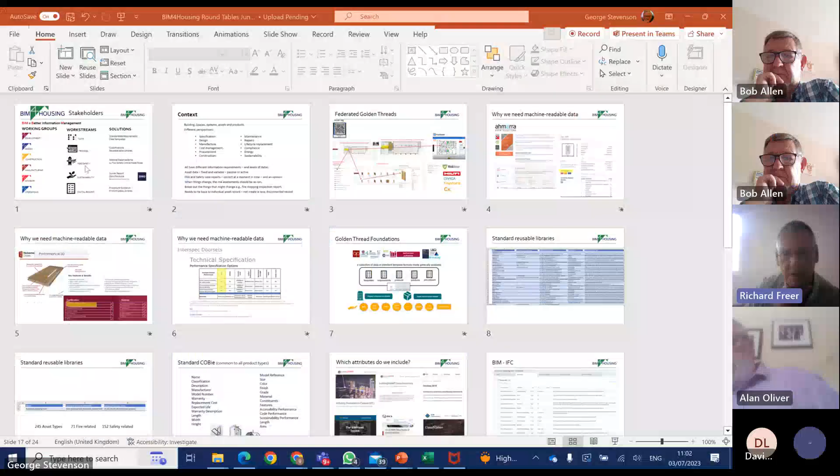When we took over BIM4Housing a couple of years ago, one of the things we wanted to do was move it away from BIM being about 3D modeling and focus on better information management. The question is, what information do we actually need to manage? Different stakeholders need different things.

So we set up different working groups, which meet once every two months. We've got 36 of these meetings each year, and typically they have 20 to 30 people attend.

What we do is try and look at what information would make their tasks easier. For example, what would make a construction team's work easier if developers provided them with better information, and likewise operations teams if the construction team handed over better information.

The way we acted on that is to set up work streams, which then work for probably 3 or 4 months to focus on certain things. For example, we focused on producing standard data templates and standard processes. The work we're doing today has come out of the fire safety group, looking at typical critical assets. We've got a lot going on at the moment with decarbonisation, and also trying to standardise digital records and safety case reports.

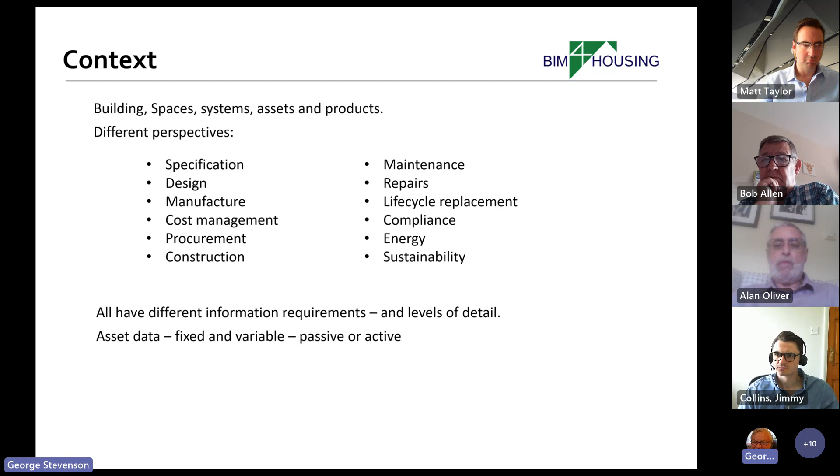The other thing is that a lot of the things we've got going on at the moment, particularly because of the Building Safety Act, are snapshots in time. Although it's important to have a safety case report, we also need to recognise that the landlords have got to have everything current at that point in time. So you can't simply say, well, we were okay when we did the fire risk assessment last year - it needs to change as risks change.

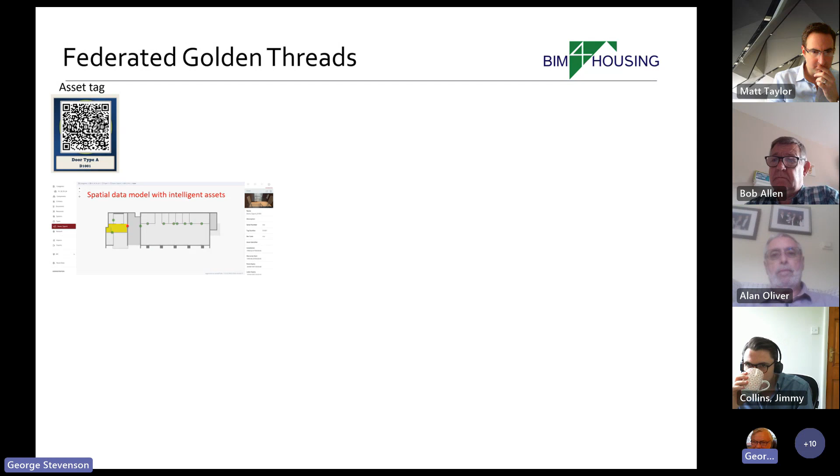And then to be able to tie everything back to an individual asset, not simply recording the fact that we've done an inspection. Part of the process of doing that is to use RFIDs or tags for asset types. But one of the things that's important is to recognize that we're ending up with lots and lots of golden threads.

From a construction point of view, we're probably testing to make sure that certain information has been provided. From a manufacturer's point of view, it's important to tie that together with what the product was that was actually satisfying it, and then the product data being provided, but then looking at it in context of where it is. From a fire engineering point of view, you really need to know what the spaces are on either side. That's why we're trying to federate together all of these different threads that are being produced by people using excellent applications like Plan Radar, Riskbase, Hilti, Keystone, CX. The important thing is that they shouldn't all be separate, isolated information sets - we need to be able to bring them together. That's one of the reasons we need the information in a machine readable format.

A lot of the information in this data sheet, for example, is well laid out, easy to understand, but it can only be understood by a human. So fire rating, for example, is presented in this way that a human can read it, but it's not machine readable.

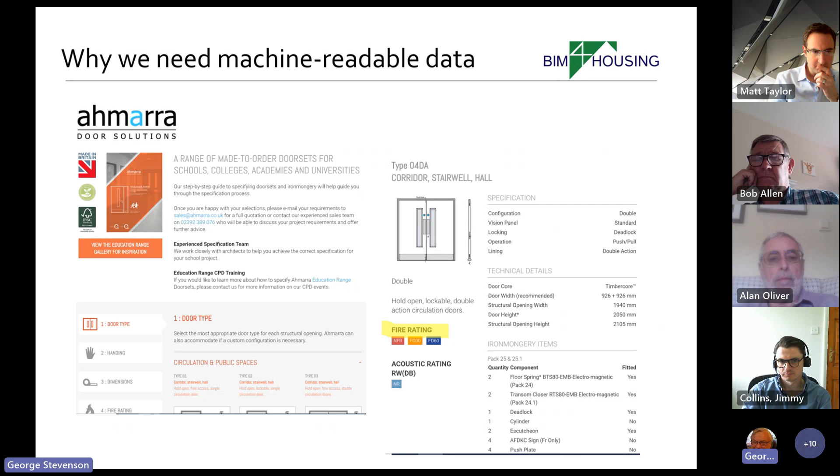So certain of the information we want to try and make sure is machine readable. We've been on this journey for the last couple of years with HACT and organizations to try and come up with standardized data templates, which we can share with you if you're interested. That can be used either for new projects or for existing buildings. And if we organize it that way, it doesn't really matter what software you're using, because we can present the information in a standardized format.

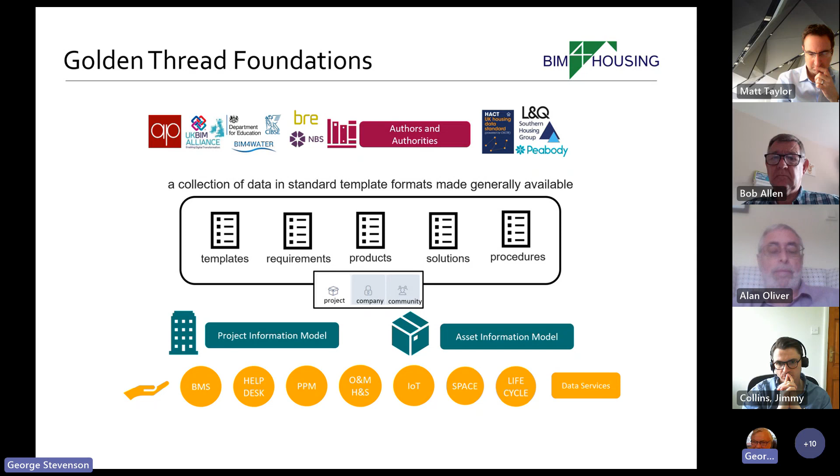This is some of the work in progress we did with HACT to come up with the 250 or so standard asset types that we've got. So here, for example, on the left-hand side in column B, we've got standardized names that have been agreed across the different social landlords as to what something is called.

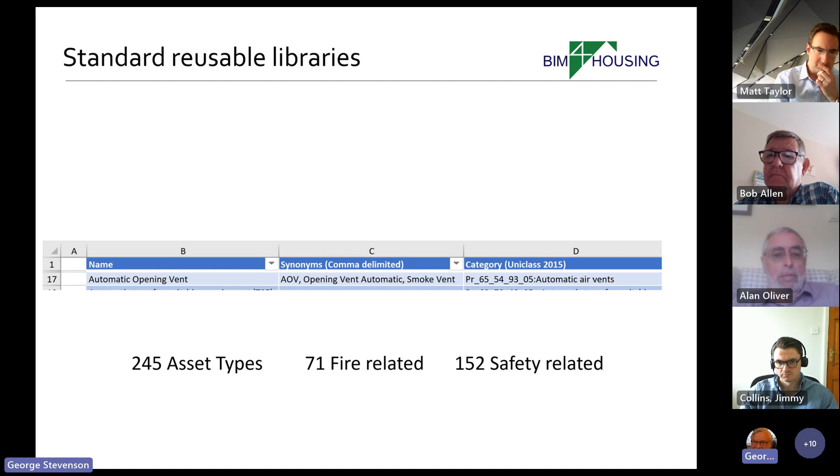Now, that might seem blindingly obvious, but if you look in the synonyms column, you'll see that an AOV, for example, is described as either an automatic opening vent or a smoke vent. By putting them into classifications, it means we can start to provide some sort of order we can tie data back to. So we've actually got 152 safety related assets identified, of which 71 relate specifically to fire. Now that's again interpretation, but it gives us a basis on which to work.

Some of you will know about COBie, some may not, but COBie is the international standard for asset information exchange, handover information exchange. So that's what we tend to use to do the high level information.

So here, for example, this is common to any type of asset. Doesn't matter whether it's plasterboard, a door, a fire collar, a smoke vent. They're all standard. The thing that makes it different, the difference between the attributes needed for a fire collar or a damper or a door or a wall, will be down to that particular type of element.

And the question is, which attributes do we include? Building Smart, or the BIM community, has got a large data set that we work to. But there's other information as well - classification systems. NBS have got their own data sets. CIBSE have got their own data sets for building services. The surveyors and cost managers have got their own data sets, as have the wholesalers and merchants - they use ETIM. So the question is, which attributes should we or shouldn't we include?

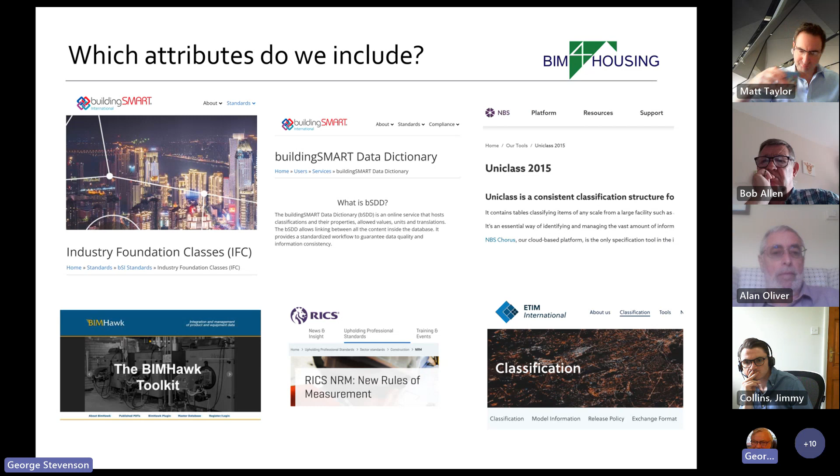So we led the Golden Thread initiative, which L&Q set up for asset and survey information. One of the challenges was to ask some of the people on this call, actually, what data do we need to know about firewalls? And the answer to the question is invariably, it depends. It depends on where that wall is, what it's doing, and also how it relates back to building regs. So that's the purpose that we did.

And this is the exercise. We've done this now for 10 of the 12 asset types. Today we're doing this, tomorrow we're finishing off with dry and wet risers. And for each of these different processes, we've actually looked at what does the asset comprise, how is it made up.

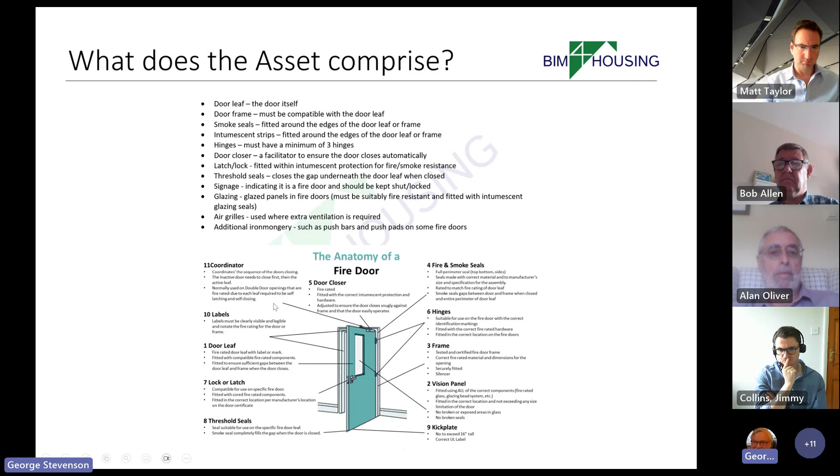Also, what information can we put in - for example, for this door - that can be managed separate from the BIM models, but is specific to it being a door? So for the fire door, some of these, like fire rating for example, may be common, but obviously a lot of the others won't be.

So we need to be able to hold this in a database rather than in the BIM systems, because it might be that it's not just BIM systems, but also we want it for procurement and operations. So the way in which we go about that is by holding it in databases and then using API connectors to connect it back to the applications.

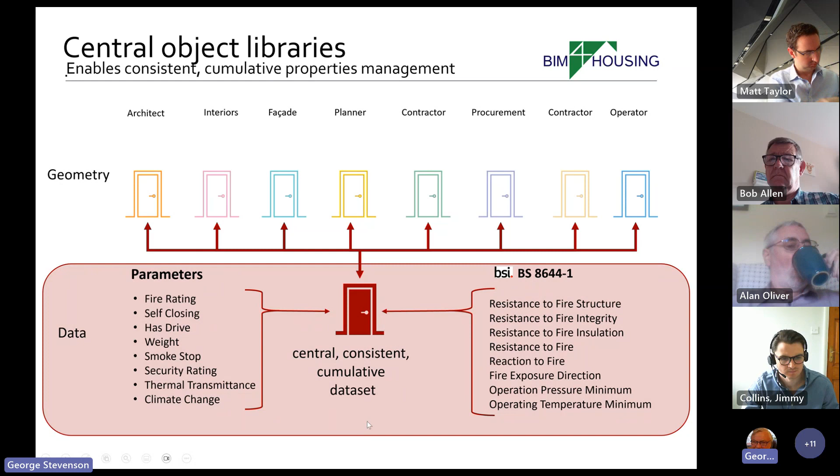So that's why this exercise that you're going through today is so important. It also means that when new information comes in, like the new fire standards, it means that we can relate it easily to that same information and do that as an update. So I'm just going to show what we've already got, and this is what we're going to go through today. What is a firewall?

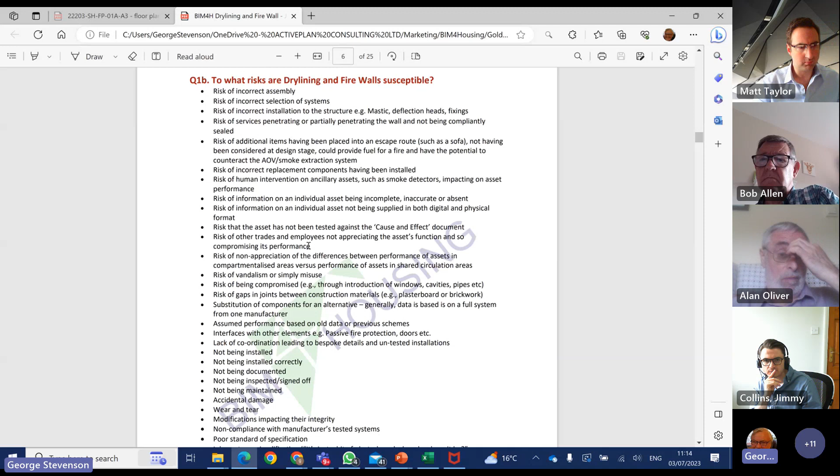What risks does the wall mitigate? We have to answer that question to align it with what the regulator's looking for. We also wanted to identify from the roundtable sessions what actually goes wrong. Matt Taylor, who's on this call, gave us some great examples of things that don't work. And there's a lot of things that people do wrongly that prevent the firewall from working.

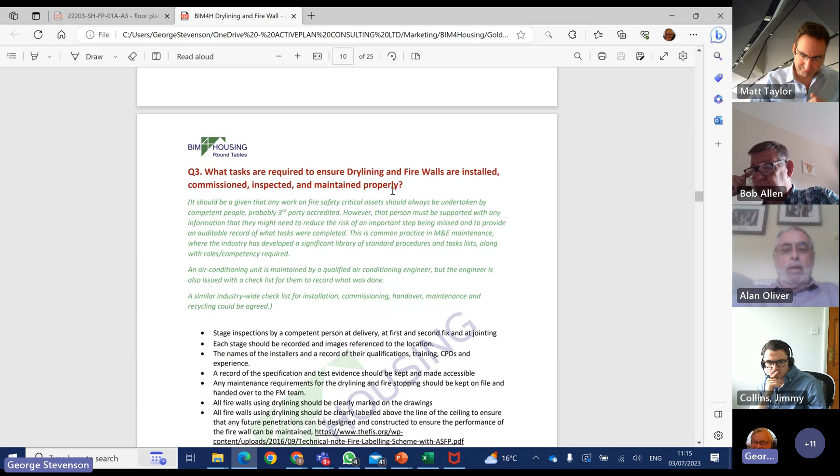The next question we're going to go through is what information's needed, and this is where we want to try and get to that machine readable information, if at all possible. Then we're going to go on to talk about the tasks required to ensure that things are installed properly, commissioned, inspected, and maintained properly. And then finally, we go on to competency. What levels of competency are needed? Big topic normally. And how should we manage changes?

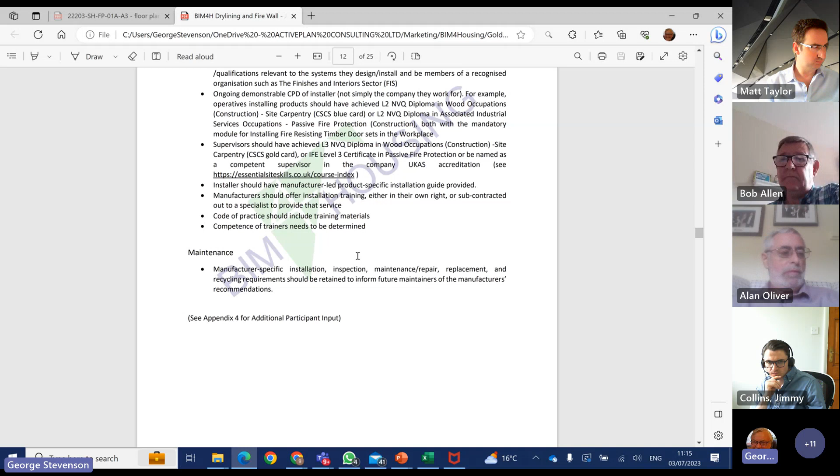So this is the work that was done 18 months ago. We're now refreshing this to reflect what we've learned over the last couple of years. Okay, back to you, Richard.

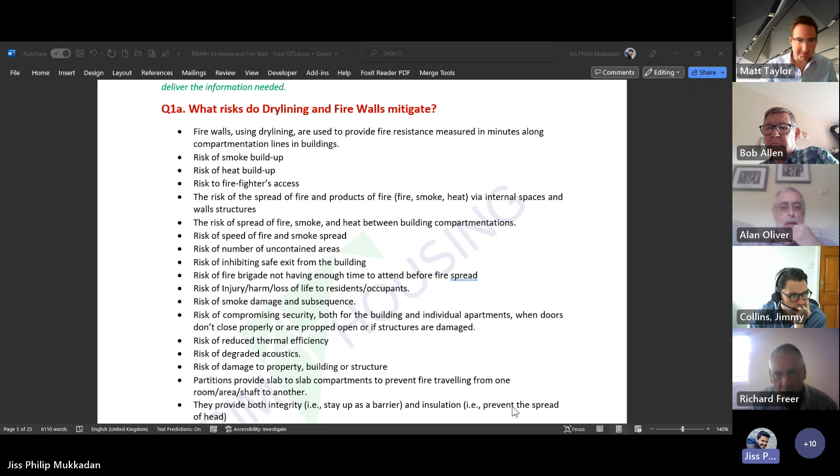Are you there? Yeah, I'm here, I changed it. Can you see? I already changed it into heat. Oh, it's not showing on the screen. Let me just close the sharing end. It's at the bottom of the screen. Is it okay? Can you see? I can't see it yet. Just a black... yes, okay.

Right, so sorry, Alan, the one further down, what? Yeah, and then the one further down, it says the spread of heat. It should be the transfer of heat. You don't spread heat, you transfer heat. Well, that's transference of heat then. Transference of heat, yes, yeah, transference of heat. And again, it says up above it, they provide both integrity, stay up as a barrier, and insulation, prevent the spread of heat. That should be prevent the transfer or transference of heat. Right, okay, so where it says prevent, that's it. That's the one, the transference of heat. Okay, good points, good points.

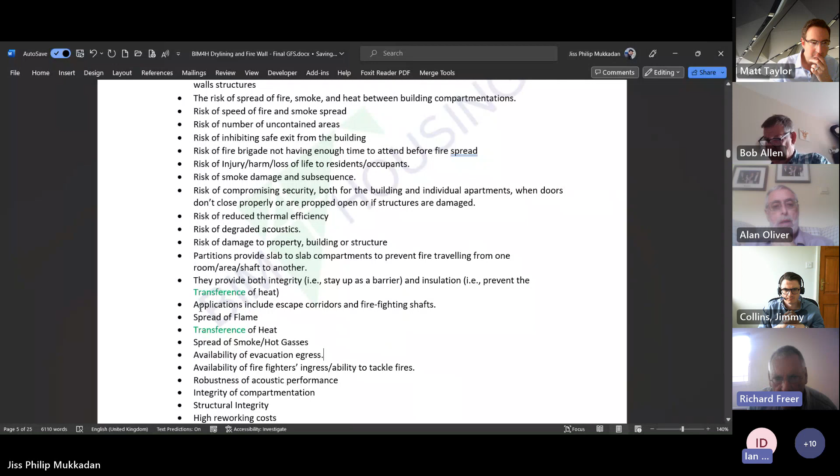Anybody else got anything that is glaringly missing or needs amending on that list? Is that the bottom of the list, Jiss? Sorry, I've just got a comment there. There's one above where we were. Applications, sorry, it says applications include escape corridors and firefighting. Yes, yes, should applications be in there? It's what they mitigate, not the application, isn't it? Not where, no, you use it, it shouldn't be there. No, that should be somewhere, but yeah, not there. You're correct, thank you.

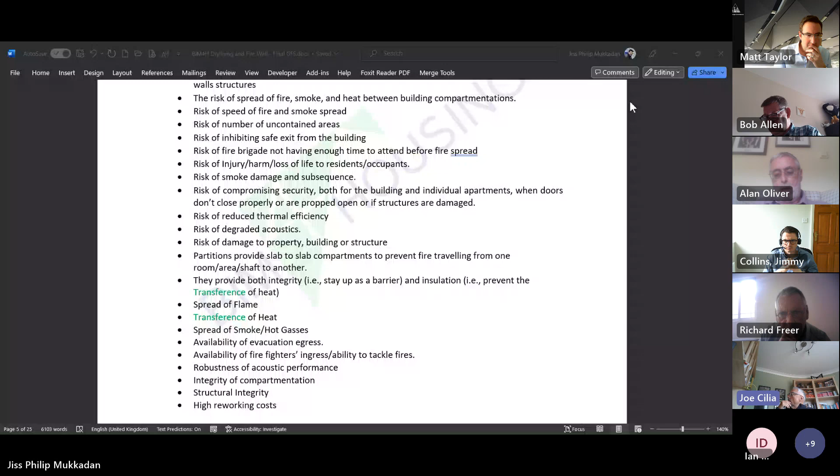Anybody else? Just looking down the list. Second item down, risk of smoke buildup. What do you mean by that? Because the risk of smoke buildup, if it's a compartment and the compartment isn't ventilated, it's the ventilation system that deals with the smoke buildup.

Yeah, I think that needs removing. Do you think? What do you think, Matt? I'd say we've got spread of smoke in there already. I think there's a number of different factors in relation to smoke buildup, including ventilation and other services concerns, which is generally outside of the dry lining. Do you remove it then? Take it out? I think it's covered elsewhere, covered in spread of smoke.

Excellent. Anything else? The risk of degraded acoustics - are we saying risk of detriment to proposed or specified acoustic performance? I don't know, it depends. I don't know who added that. This came up on a number of meetings about acoustics, and it was a new one to many people. At the time it made sense, but I don't remember the background to it.

So the only risk I can understand about degrading acoustics is the risk of the sounders not being heard from one space to another, but that's mitigated separately. The wall itself will provide airborne sound insulation - that's one of the reasons it's there in the first place. So as a risk it will be about the sounders, but again I think that's mitigated separately in the sounders themselves. Yeah, let's take it out then.

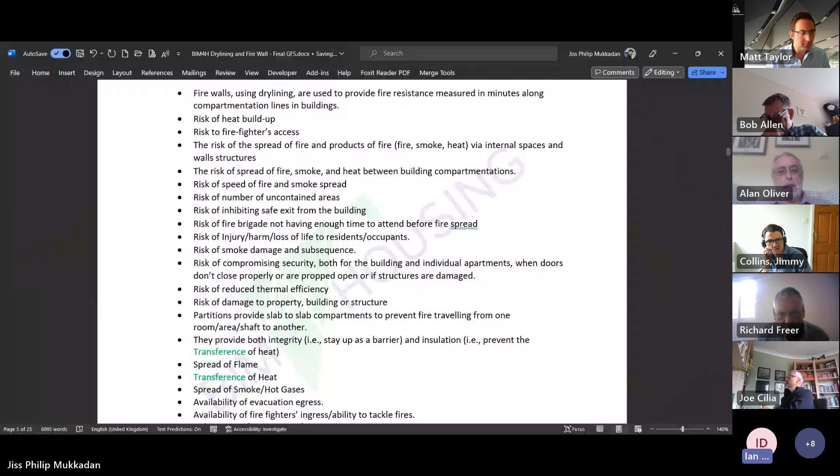Can I just say that quite a few of these are repeats of themselves, aren't they? Exactly, I reckon half of that list is probably a repeat of the other half. Could be - offline it would be worth just going through and culling a lot of them that say the same thing. Yeah, looking at covered deduping - you've got transference of heat in about 10 different ways, and transference of smoke. At the end of the day we're saying the same thing many times, aren't we? Yeah, okay, definitely. Let's scroll down to the next one.

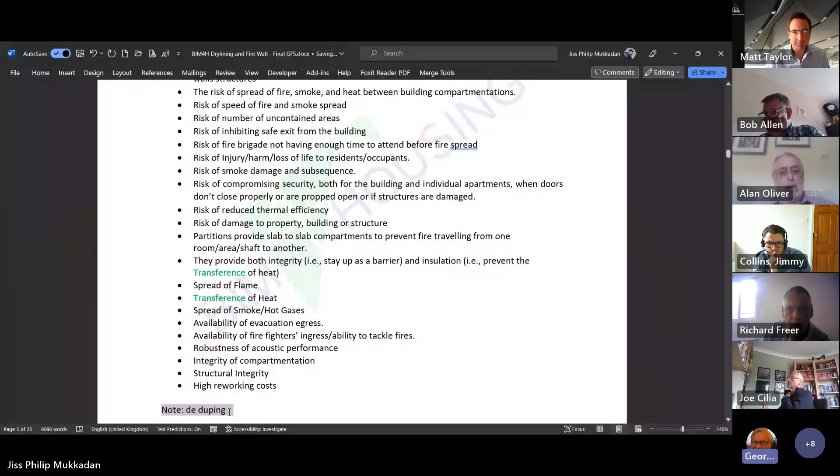Ian, is that something you could help Richard with afterwards? Ian? Sorry, I muted myself.

Could you help me do some of that deduping after the meeting? I think it's pretty straightforward - just look at them all. If I got a copy of this offline, I can. Yeah, if you could do that, give an opinion. I think part of the reason there's a lot of duplication is because a number of people put comments on that were slightly different and had a slightly different emphasis than others, and we didn't want to miss anything out. But if an expert can help me go through that and make it just one line instead of five, that'd be excellent.

Alan. Okay, looking at the bullet point just before the bottom where it says substitution of components for an alternative, generally data is based - so that's reading correctly? Yeah. Generally data is based on a full system from one manufacturer. There's other people here who can probably confirm this better, but I think it should say one board manufacturer. The fire tests tend to be done by board manufacturers, and I think it's important to put the word board in there. Somebody's shaking their head very strongly.

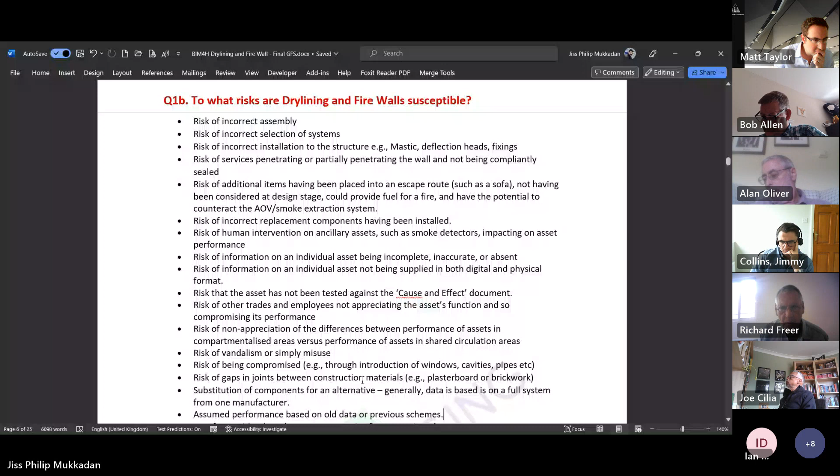What risks are drylining and firewalls susceptible to themselves?

I think we've got the same issue as Ian suggested earlier. There's doubling up. Well, that's not an issue because we're going to sort that out afterwards.

I don't know whether you're planning to put these in some sort of order, but the first risk is incorrectly specified. So you've got selection further down, selection comes up, but if the specification is wrong, everything thereafter will be wrong.

Right, now we've had this before. This is George, help me with this. Didn't we have this before? And it's about the asset, you're talking about what's the risk to the asset itself.

Sorry, wrong specification isn't a risk to the asset itself. It's a risk to the... George, help me.

So I guess what we're saying here is this particular clause was put in, Joe. It's added in, that's why it says 1B. It's because when we've been in the meetings, people have told us about things that tenants or people do to the asset to stop them from working. So that's the purpose of it, rather than looking at the design and construction side of things, which we do come on to, if that makes sense.

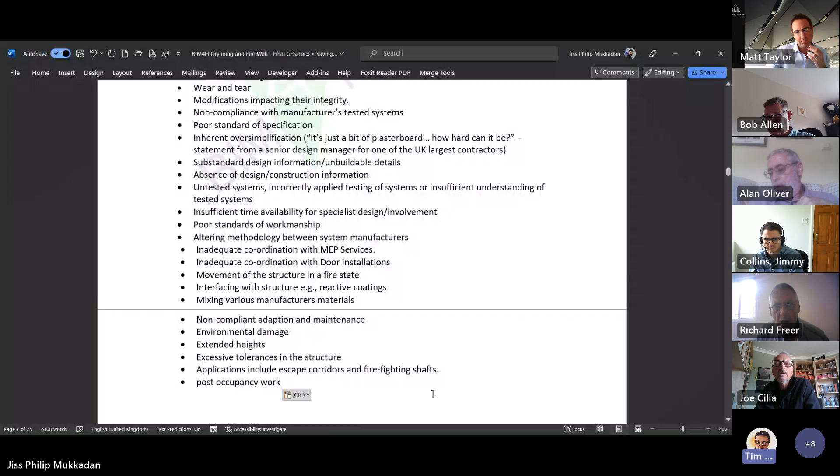Could you just put something in the chat for us, George? Yeah, I've just put something in the chat. I think it's post-occupancy work. Isn't it covered by modifications impacting their integrity?

I wonder whether people would understand that, whether you need to be really basic - don't put a pipe and a duct through something that's already there without designing it. Okay, well if you could put something in the chat for us, then we can pick that up and won't miss it.

Matt: I'm not entirely sure at this time how this might be worded within the bullet points, but one of the risks I see time and time again is the assumption that a system can be used in a bespoke arrangement and still achieve the same fire performance as the tested system. The system manufacturers test under quite strict test guidelines to prove a system is capable of providing a certain fire performance. And now even under European standard, there's an extended application scope for that test information.

But when we design buildings, we design interfaces as we want that interface to look. So we look at various weird and wonderful arrangements and assume that the standard test information for that manufacturer's system is going to cover that. We've got a section on information - I think possibly it would be more relevant there, Matt.

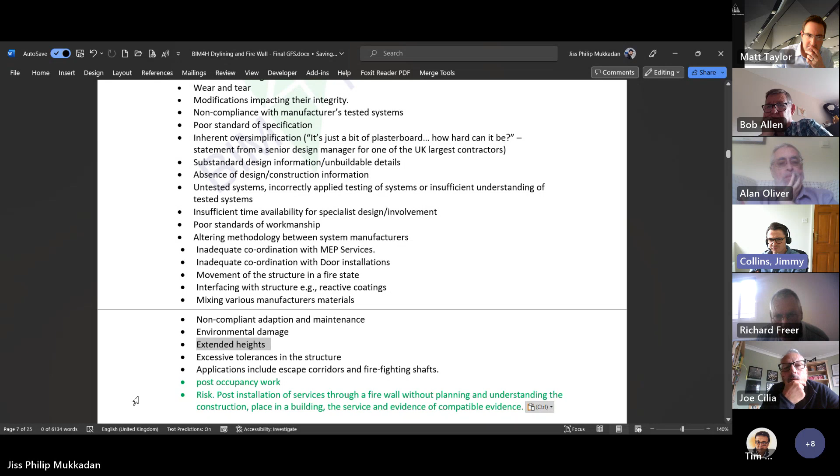I think it's similar to what Matt's saying, just a bullet point saying extended heights is quite misleading and vague, and I don't think that's particularly helpful. There was also a note above about testing to a cause and effects document. I'm not quite sure what that means.

Right, sorry, well, let's do one at a time. So you're talking, what's the one at the bottom? It just says extended heights. Extended heights, right. Does anybody know what that means?

Well, it's referenced, or should mean. Yeah, it's in reference to the changes, the removal of the BS series and the move to EN, as Matt was alluding to, and there's fewer fields of application available in drylining. So it's not clear. Is that what you're saying? Yeah, I think that's it. Could you put something in the chat for me that would be clearer?

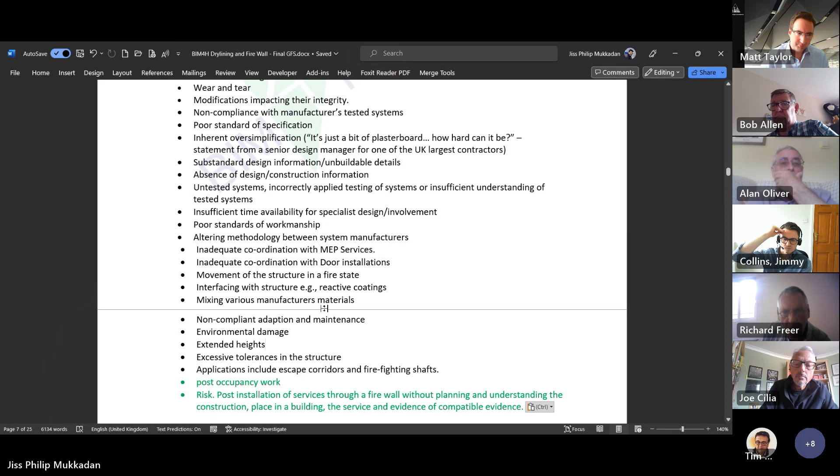Fantastic. Sorry, and the second point, I think it was further up, was around... scroll up, Jiss. Jim is from Knauf, by the way, so just to note. Here we go. Sorry, the risk that the asset has not been tested against the cause and effect document.

What is the cause and effect document? Joe, would you know that? Because as Matt alluded to, sorry, it's on mute. No. We test to an EN by a test methodology. I don't know what that means. That's come up, a number of the meetings have alluded to a cause and effect document.

Yeah, it's part of the fire strategy, I think. Okay. Is anybody on? There's a lot of people on this call that are much more knowledgeable than me, but certainly I've heard of cause and effect documents regularly. I could pick that one up maybe. So it's Ian Doncaster here, we do smoke ventilation systems.

So when we're commissioning a system, we would need to check it does certain things under certain different conditions. So our cause and effect document would be that. But it's more about mechanical operation under different conditions, really, or under different control conditions. So it's about the control strategy to meet the fire strategy. But I could see the only reason might be something like which side the fire's coming from, because depending on the cause and effect, you might have fire from the inside or the outside of a shaft.

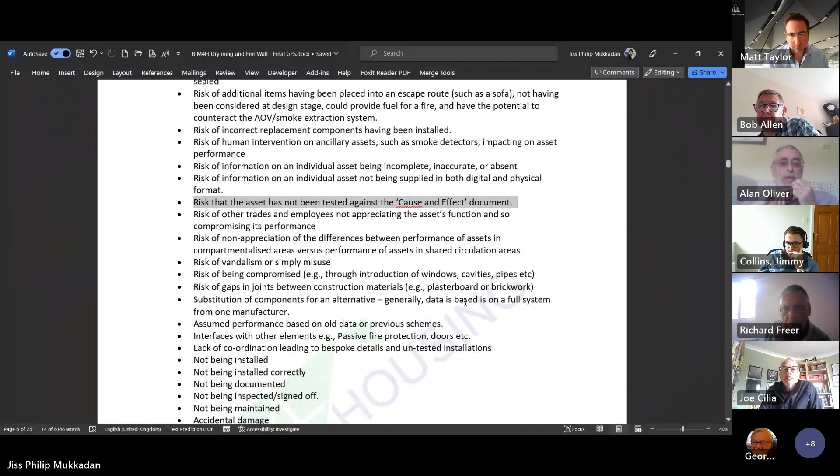Tim. Yes, I was just going to make, it's a thought that occurred to me. In asbestos management, we always have permit to work stickers all over the place, and it seems to me that when you've got something like a fire, fire compartmentation, there is a temptation to just drill through that. Is that there should be a warning to say, well, you've got to actually go through this process. So I don't know whether that falls within that, but it's more about how you manage it going forward.

But yeah, it does seem to me, because we came across stuff on a hospital where they put in cabling for monitoring, and they breached all sorts of things, and the thing was bloody leaking. It was that bad. So, yeah, absolutely. I think that comes down partially to, which we'll be covering shortly, which is competence, and also information, because it's down to the information about the wall and what should and shouldn't happen with it, I think.

I don't know if anybody could see, can you see what Joe's holding up? Can you see that, Richard? No. Yeah, he's holding up a sticker. Do you want to explain what that is, Joe?

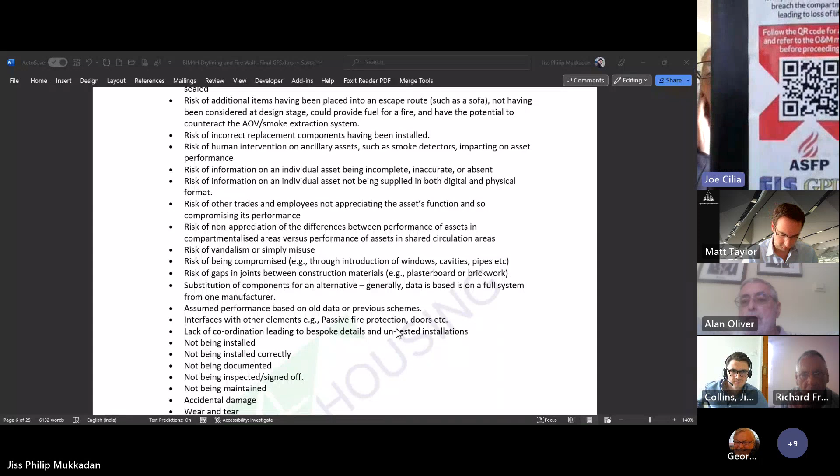Yeah, if any of you have got a smartphone, if you hold your smartphone up to that QR code, it will take you to a set of information. And the idea of the sticker is it sits in the void above a ceiling, and it warns people. It's warning, this is a firewall, providing compartmentation. Don't do anything until you've checked this out.

And the QR code then will take the user to advice on how to plan it, to ensure that you get a compliant seal depending on what the service penetration is. And it's advice which is based on a piece of guidance that was produced by BESA, ASFP, FIS and BSRIA recently, and also the advice from ASFP, their Red Book.

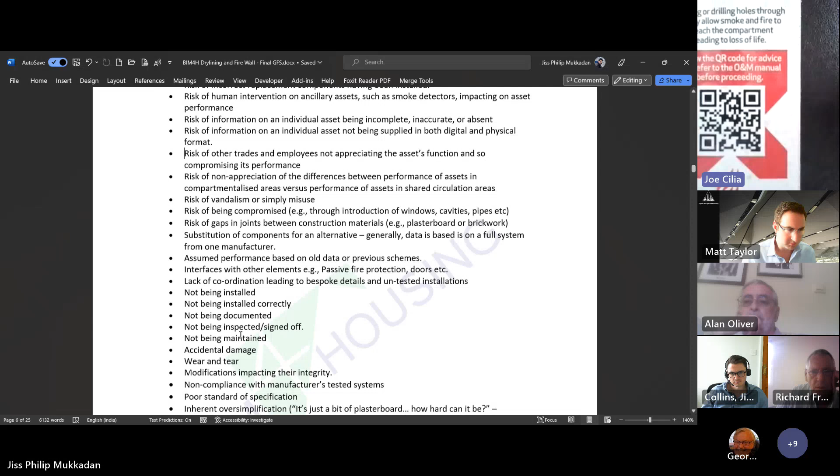So okay, right. So that again, I would say is for the next section we get onto information, isn't it? Yeah. Okay, right, let's just stick with 1B and see if we can nail this. Anybody got anything else on the risks to the drylining itself? Have we exhausted that?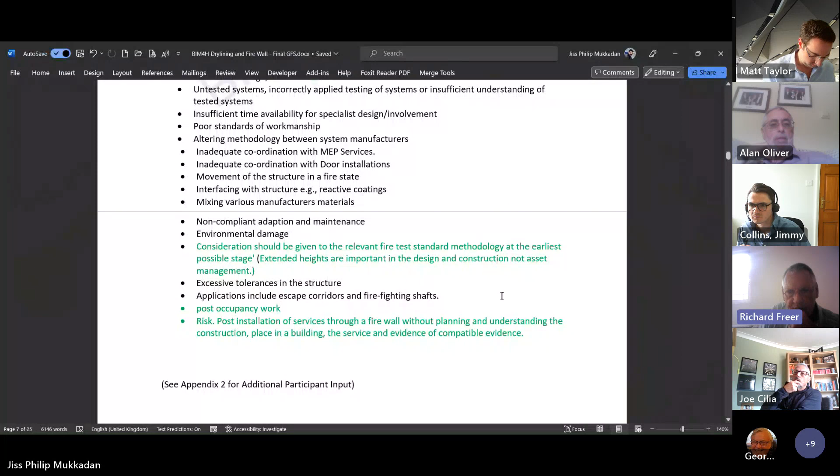Penetrations also include doors. If you put a non-compliant door, which is apparently one of the things that happened at Grenfell where the flat doors were changed, then the wall itself will become non-compliant because it won't perform.

What about painting and things like that? Is that a risk? Have we got paint on there? No, I'm not aware of painting being a risk, mainly to finish rather than performance. For example, certain types of paint aren't recommended onto dry lining, but that's primarily due to reflection of the surface and finish related issues.

A lot of what we're doing here is focused around fire and structural safety, but a growing thing is mold. Are there any risks that would result in mold that people might do to the wall to prevent it from breathing, maybe? Mold comes either through lack of ventilation, cold spots on the outside of the wall, and sometimes mold happens quite quickly where the boards are installed in the wet,

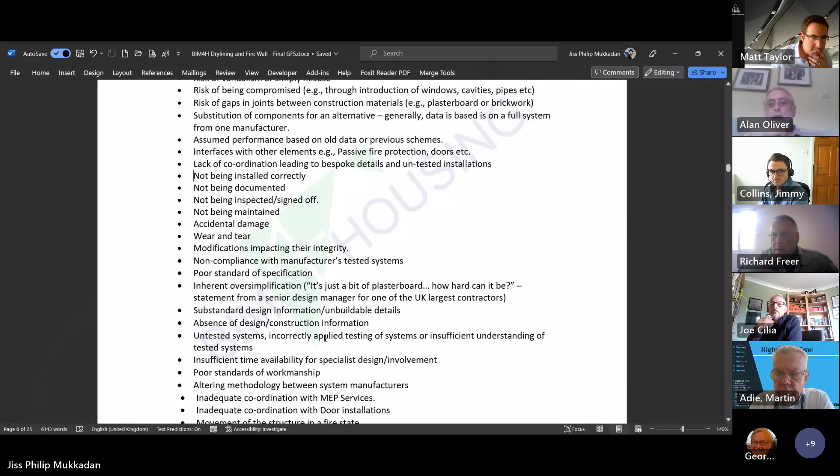Hi, Alan Speed of PRP. I was thinking before someone mentioned mold, I was thinking moisture. We know the NHBC are getting really hot on water problems over and above fire issues at the moment on some external wall issues. Dry lining is put on external walls, it forms part of through wall systems, and moisture is an issue with that. I don't know if that's within scope of this document.

Could you put a note on that for me, Alan, in the chat, please? Okay.

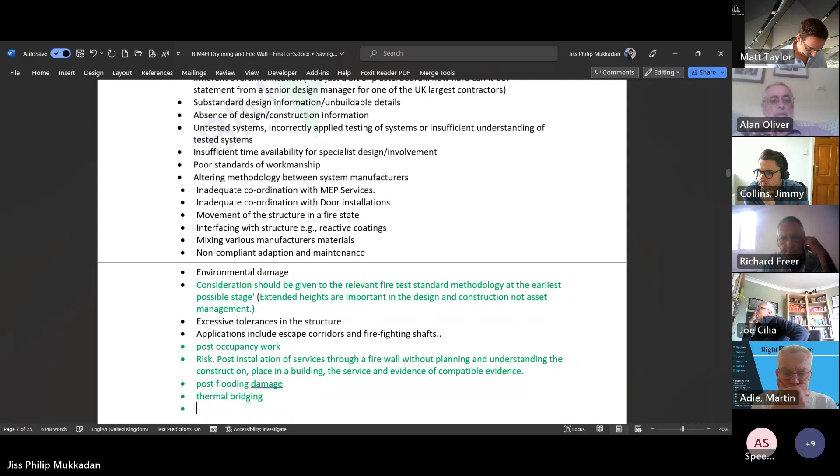Fantastic. Could I just ask a question? Would firewalls include external walls, Joe? Yeah, as Alan just mentioned, actually, the risk is where SFS has been used to create the external wall, and they also need to have fire protection, and they sort of come under the barrier of, as Alan has suggested, through wall.

Right, different construction, I would say, over an internal partition. There are risks there, and a lot of the risks come down at the front end specification. For example, you can't put a timber pattress in an external wall.

So is there anything else we need to add into this section so we can move on to question 2? Just on that, Jimmy, I know you're on the call, have the board manufacturers changed any guidance recently on pattressing on internal walls, internal firewalls? Or Bob, you might know that too.

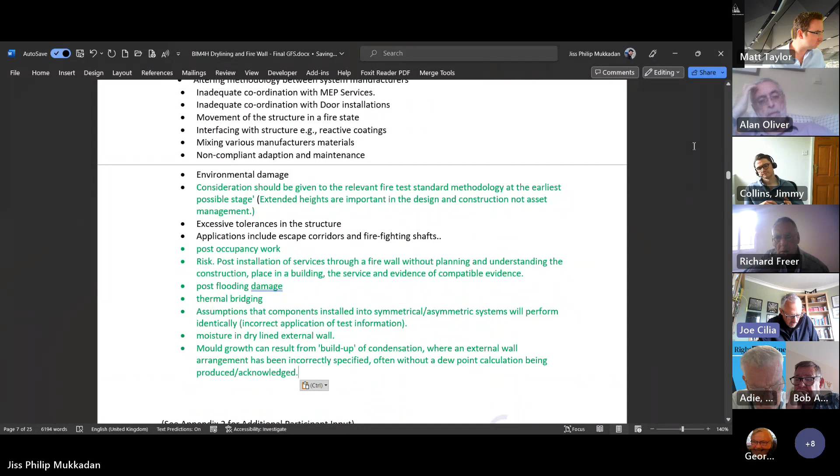I think that would be down to what Joe and Matt, the principal people putting this together, decide. Certainly external walls are important, aren't they? And we don't have another asset type covered, so I think we probably should try and accommodate external walls. I would do it separately, I think there are so many differences. The construction is different, and the parameters they have to deal with are greater, although internal walls still have wind loading, external ones have different ones.

Okay, well, right, so we've decided it's going to be internal. Let's scroll down to question 2. Richard, could we also just make a note that we probably ought to hold one on external firewalls? Yeah, I've got that, another session. Thank you. Yeah, absolutely.

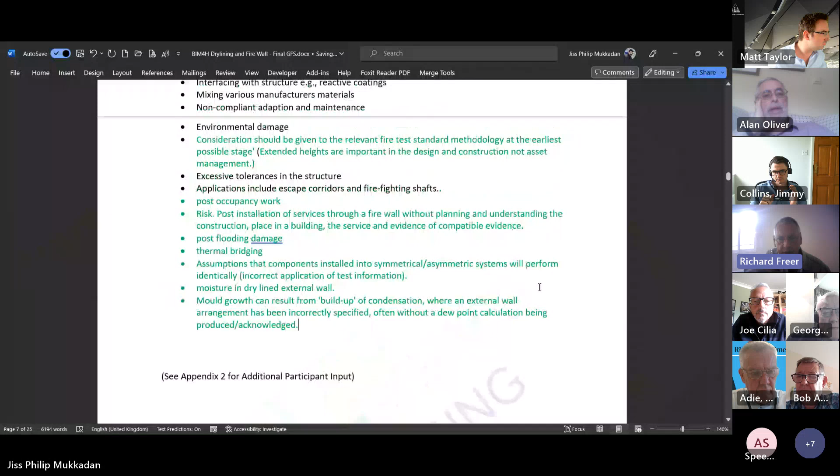Right, question 2: what information is needed about drylining firewalls to ensure they perform correctly? Let's scroll down and see what we've got already. Right, we've got requirements, specification, performance, materials, construction, installation, inspection, maintenance. So we've got a lot of sections there.

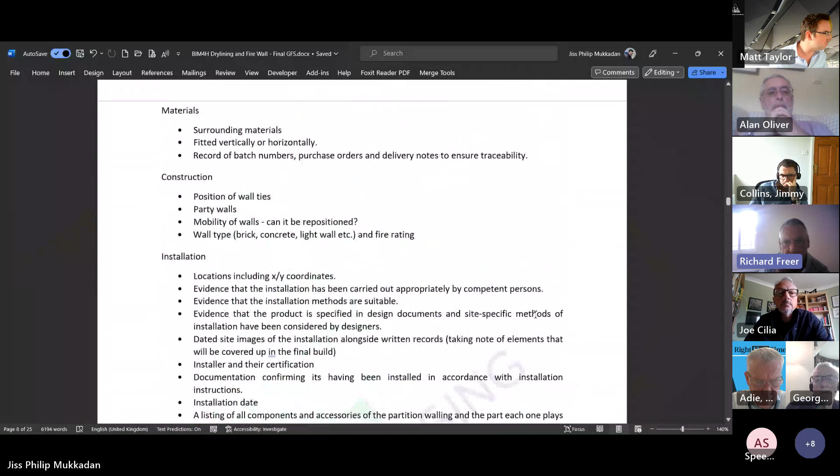Let's do them in order, obviously, so we'll start with general requirements. What information do we need to know? We're just doing requirements: type of dry lining, size of walls, manufacturer of products. Anything else in requirements?

I would maybe mention the substrate they're being fixed into.

Can I throw one in here that I'm not quite sure is the right place, but it's an issue for smoke ventilation people: when is a shaft wall a shaft wall, when is it a wall, and when is it a duct? It affects the smoke control dampers we use and how we fit them. There's quite a bit of disagreement around the industry about whether the wall is being used as part of a shaft or whether it is a shaft. I think there's an issue there, I'm not quite sure where it fits or how it gets covered, but it's a pretty hot topic in our bit of the industry at the moment.

Isn't it about the application of the product, in that if a dry lining firewall, shaft wall, or whatever you call it, is used to transit smoke as part of a smoke ventilation system, there should be some form of test data, or the product should have proven data that it's suitable for that application, especially given smoke ventilation systems coping with under-pressures of 1500 Pascal, when we've no idea what the furnace pressures are.

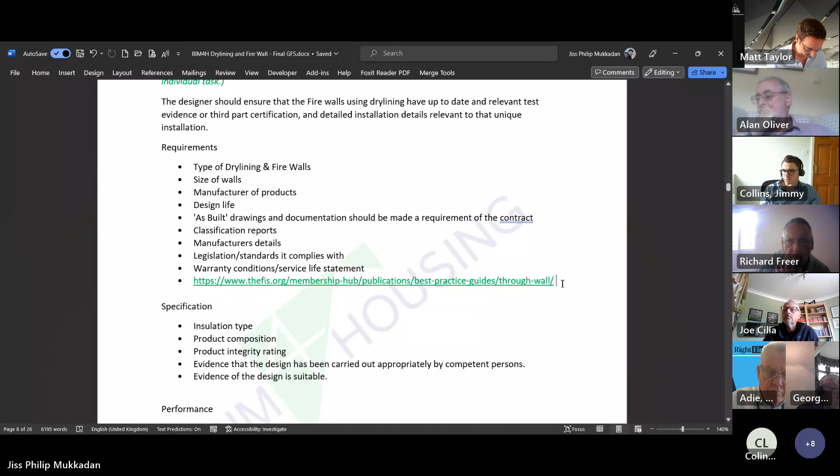99.9% of our fire test data will be in a concrete rig. If you start fixing that to cross-laminated timber or timber trusses, the substrate needs consideration for how the firewall is installed into it.

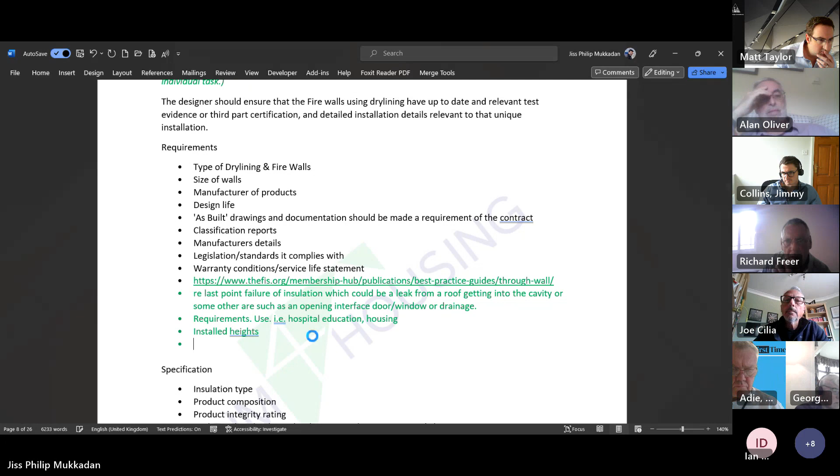Yeah, I'm trying to find some documents - I've got a specifier's guide to dry lining that I'll put in the link as well. But is that something people in that side of the industry are getting asked about? Because it's something we end up with a problem on, and then when we work back through a builder who goes back through a dry liner, we often end up with what we end up with, which may not be the right thing, because people don't understand it's not just a bit of plasterboard - it's a bit more technical than that.

Yeah, and that's the problem we have - it's the competency. A really simple example: if you take a half-hour fire-rated plasterboard that everybody talks about, as those in the industry will tell you, there is no such thing that exists. There is no such thing as a half-hour fire-rated plasterboard, and that's where we've got to get the competency right in the sector.

Yeah, well we've got a section on competency coming up. So going back to the specification and requirements, I'm going to send you through a document on how to specify dry lining, which has got a lot of these questions in it. Excellent, okay, Alan, thank you.

Yeah, hi, thank you. Just picking up on an earlier comment, something we're tackling in the office at the moment is the specification of smoke shafts to match the interfacing elements, as opposed to matching the ADB or compliance fire resistance requirements. For example, if you take a smoke control damper from one of the leading suppliers, they test those dampers typically in 120-minute walls, and the walls are of a minimum thickness. So if your building is only a 90-minute fire resistance building for structural fire protection, you find the wall doesn't meet the tested parameters of the smoke control damper. So it's an interfacing element which is actually driving the performance of the wall, as opposed to the regulations.

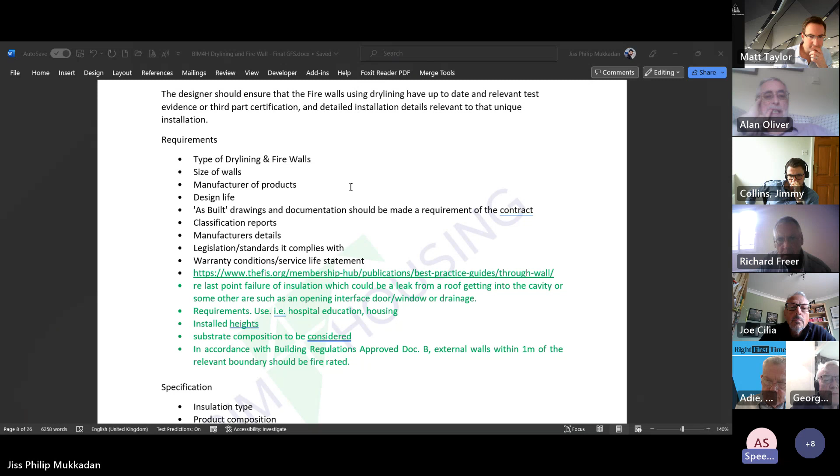Right, we've got a section coming up shortly on performance and the information we need for performance, which I think sounds like Alan. Could you pop that into the chat for me? I think that's particularly important from my limited knowledge of this area, Alan, so if you could put that in, that would be very helpful. Yeah, and then we can pick that up when we get to performance, Alan. Okay, excellent. Anybody else for requirements?

Richard, we've covered, I mean, the previous statement covers testing, but that really needs to be at the forefront of any requirements. What is the performance requirement of the wall, and does the specified wall have the correct test information to show that it achieves that performance requirement? I think that absolutely, so I'm going to say it again, could you pop that in the chat for me, and then Jiss will pick that up. Okay, anybody else for requirements? Let's scroll down, Jiss.

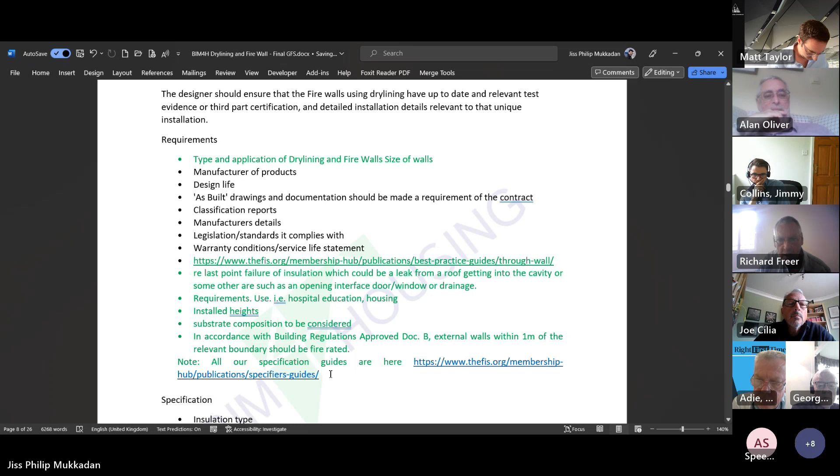I'd just like to ask the team a question on the specification and the performance requirements. That's one of the things we've been working through over the last couple of years, and that is you've got a prescriptive specification and a descriptive specification. I think those are typically defined in something like NBS Chorus. Am I wrong on that?

Does anybody know? It kind of varies, George. It depends. We sometimes see drawings, or you don't see them so much anymore, but it would have equal or approved. So it might have our product name or BG's or Siniat's and then just say equal or approved, or it will give you just the performance criteria. But where we would like to get to is that it specifies precisely what the products are that go into the system that lead to the performance. Otherwise, it opens up the possibility that you've got equal or approved for different products, but they don't work in conjunction.

Yes, that's certainly the direction of travel, I think, Jimmy, that most people are coming down. Because as I understand it, if somebody swaps out BG for Knauf or vice versa, that is quite fundamental. Correct.

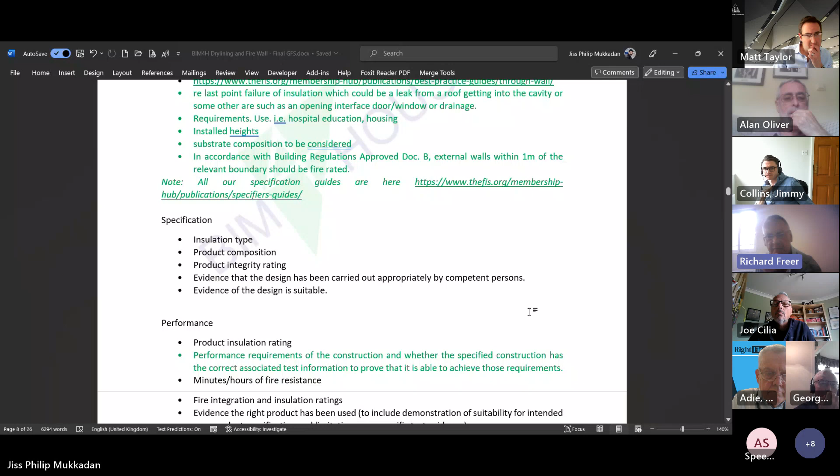All right, let's scroll down now, because I think we're talking about performance and we've not actually looked at what we've actually got here already. There we go.

So, sorry, just on specification, we should probably move away from product integrity rating and talk about system insulation and integrity performance.

Just, yeah. Okay. Anybody else got anything?

So just before we move off that, I would still like to capture whether people are... I'm not promoting NBS Chorus, I'm just trying to understand what a specification actually looks like. So we would provide a Knauf K10 document, or there'll be a K40 for ceilings or something like that, and then that will be dropped into an architectural specification. They may well use NBS Chorus or their own platform or other things, but we are providing that basis for them to take the information through the systems we specify. But I think we should advocate it being, you know, a performance-driven specification rather than vague and open.

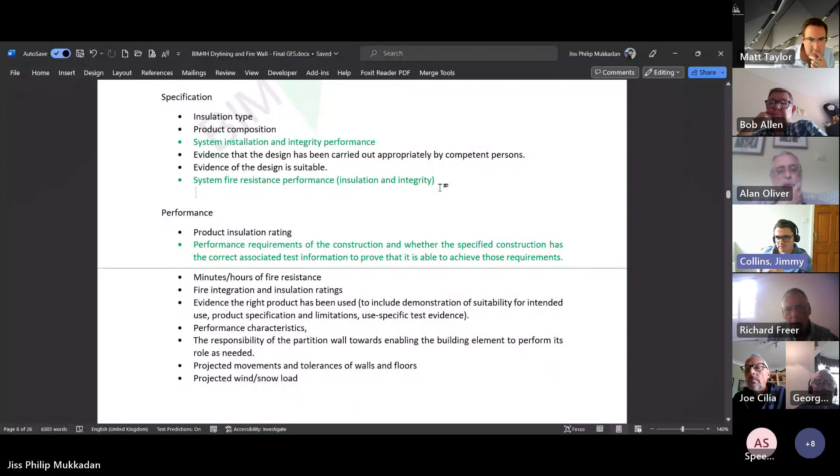Yeah. Can I just ask a question about specification? If we have a construction that is used as a smoke shaft, then there is a requirement for it to be able to cope under pressure. So the specifications don't actually have any sort of pressure ratings for a system, do they? Because under the integrity and the structure, that would be covered elsewhere, wouldn't it? So am I right in saying that there isn't a way of specifying a shaft for pressure directly under the normal specifications?

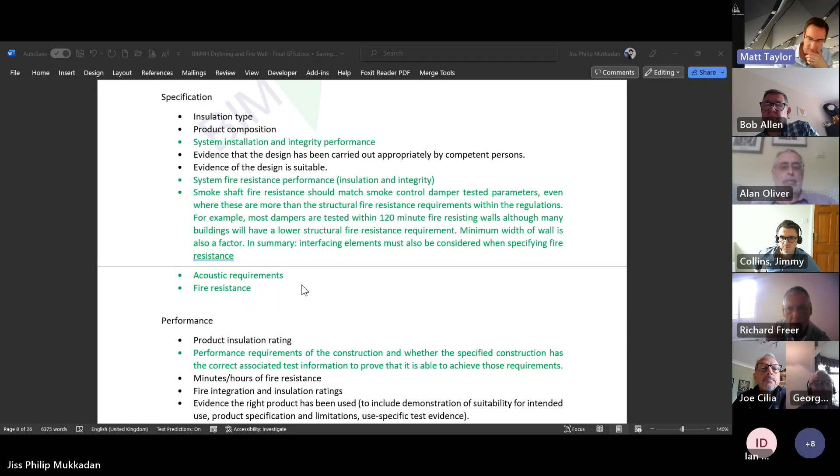I was hoping the FIS would answer. It's normally, Ian, well, for example, whereas the shaft is contained with a shaft wall construction, I've yet to see a detail which is based upon that shaft wall construction being sealed. What normally happens is excessive mastic is used, and then a pressure test is done to make sure that it achieves or falls within the required leakage per hour. So there's not a specification as such.

When it's specified, there's normally just a leakage rate in there, and then it's done by site testing.

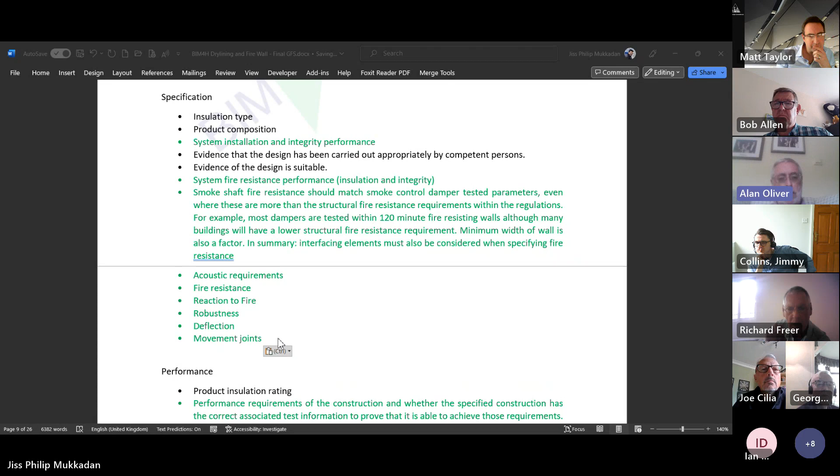If we've got time, let's really focus on these questions now because we've got a lot to get through. Jiss, if you could scroll down a little bit so we can look at the performance bullet points. If you look at the fourth one down, I think fire integration should be fire integrity, shouldn't it?

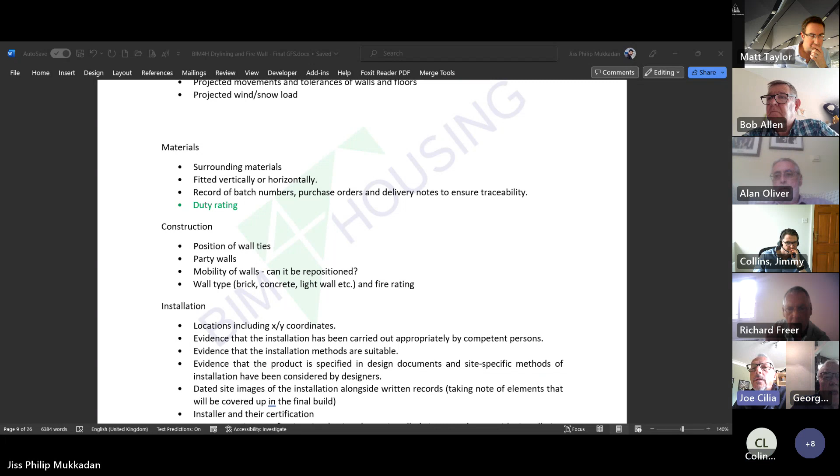Anything for construction, installation. Have a look at that.

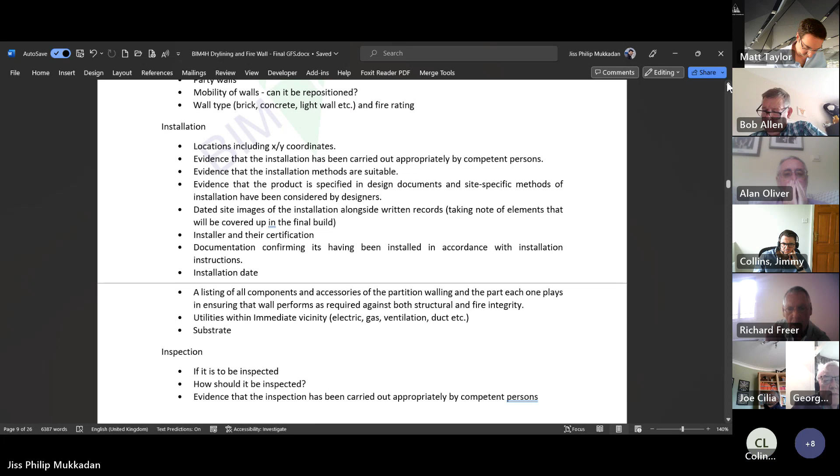Yeah, one of the things on the installation and possibly design as well is actually breaking up in the CAD models, breaking up the different types of walls so that they are held in the right form within the CAD systems and the BIM models. What I mean is that if you've got the specifications of the wall changing along a running length, which I understand does happen often, the way the BIM model is created, they'll just use a generic wall and some annotation to differentiate it. So that's one of the things we've learned, that we need to encourage people to model properly.

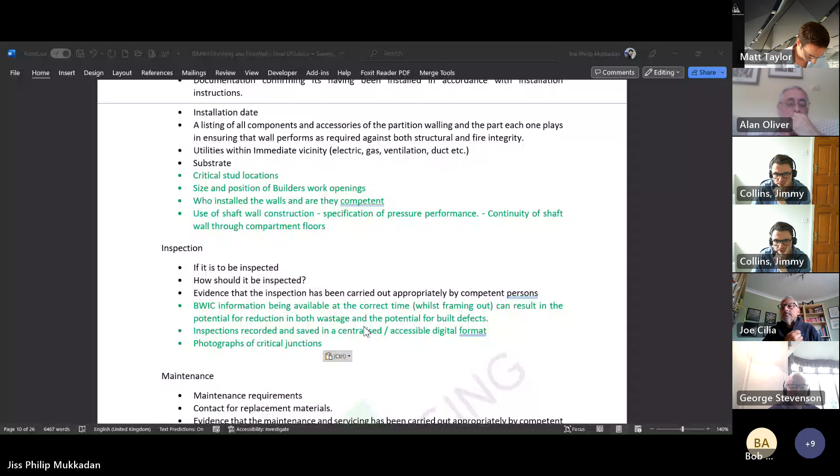The inspection bit is an important element that we're looking at the moment, and I guess they've got to be intrusive inspections to see whether something is likely to be performing. So anything in maintenance.

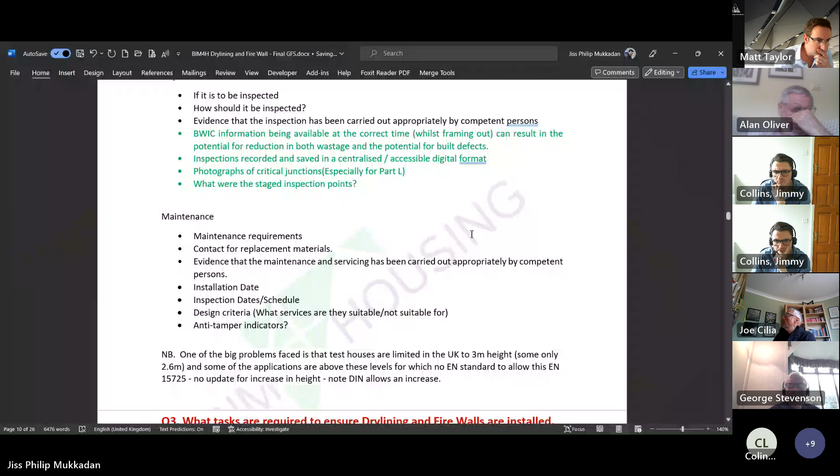Is there anybody on the call that is involved in maintenance? I think most people are involved in new build or in design or manufacturing. We are involved in some refurbishment and repair, not the practical application of it, George, obviously, but the design implications of repair works and maintenance works. As well as that, we're involved in production of the project operation and maintenance manuals.

Yeah, so I think one of the misconceptions, certainly with the O&M manual, is that plasterboards and drylining systems are going to have far more complex maintenance requirements than they actually have. Generally it's just repair of boards and stud. There's not that sort of ongoing maintenance interval as such, although this was brought up in the recent FIS housing meeting with Joe.

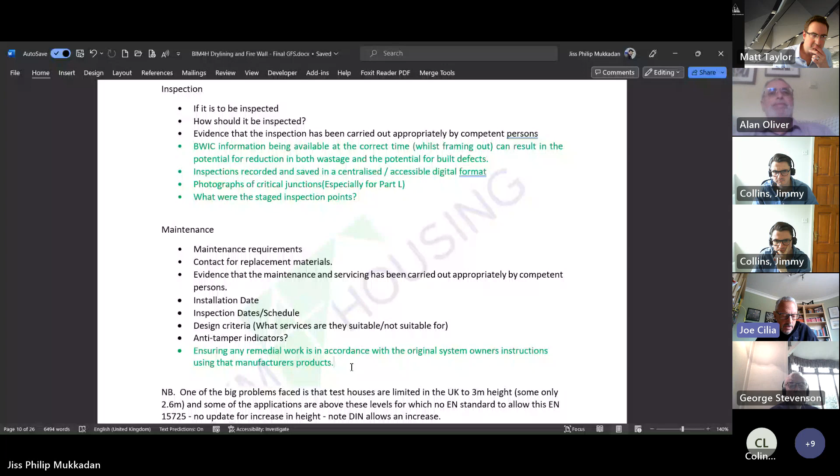Perhaps if you could quickly go through this about the three-sided service openings that Laing O'Rourke and Mace were talking to us about. So it's about having evidence that what you plan to do, you have evidence of compliance right through it. Where you normally have a builder's work opening, it's treated as a four-sided opening. Where the height is restrictive, a lot of designers now are putting the service zone too close to the soffit, so it starts to interfere with the deflection head, and a number of openings are being designed as a three-sided opening. But if that opening hasn't been tested by the systems owner and critically hasn't been tested by the fire stopping manufacturers, then you've got no evidence of compliance.

Right, so does any of that have any bearing on the maintenance section of this document? Is there anything you've covered that should be added into the maintenance section in terms of information required?

So what I've put in the chat is ensuring that any remedial work is in accordance with the original system owner's instructions, using that manufacturer's products. Excellent, excellent, that's good. Okay, let's scroll down.

Not scrolling, Jiss.

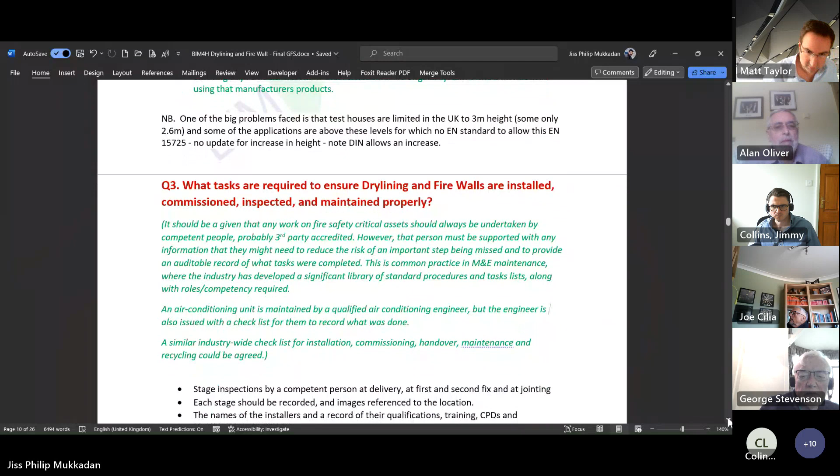What tasks are required to ensure dry lining and firewalls are installed, commissioned, inspected and maintained properly? Scroll down now, Jiss. So we've got general at the top, then we go into specification and installation. Let's have a look at the general ones first.

Just scroll down and let's have a look at what's in the others so we're not duplicating. Scroll down a bit more. And a bit more. Is that everything? Okay, back to the top, mate.

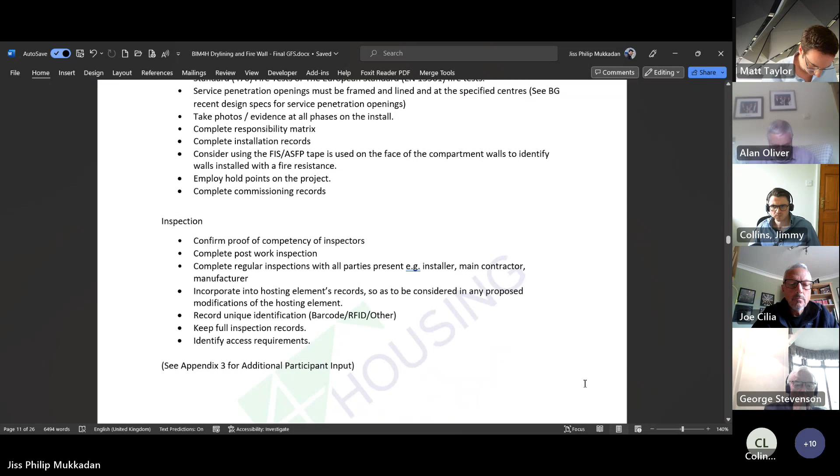Okay, so just put a note in there about the benchmark, and it's a bit lower under installation. Brilliant.

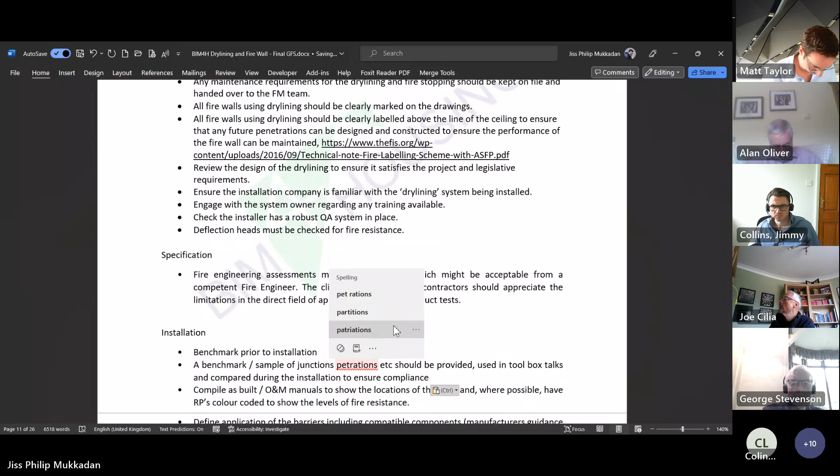As I say, everything that goes in the chat we'll pick up. So whether it's a bullet point to go on here or a note about a bullet point for us to rewrite or relook at, then it's all there. It's just getting it on there.

This is a living document, by the way. So if you look at this afterwards and decide that you want to clarify something or add something, then please do so and let Richard have it. Yeah, this will be posted all over our various websites, primarily on our black box site, where you can go and make comments that we can then update the actual document with. And your names will be on as contributors, by the way. So yes, you could even hit the front cover.

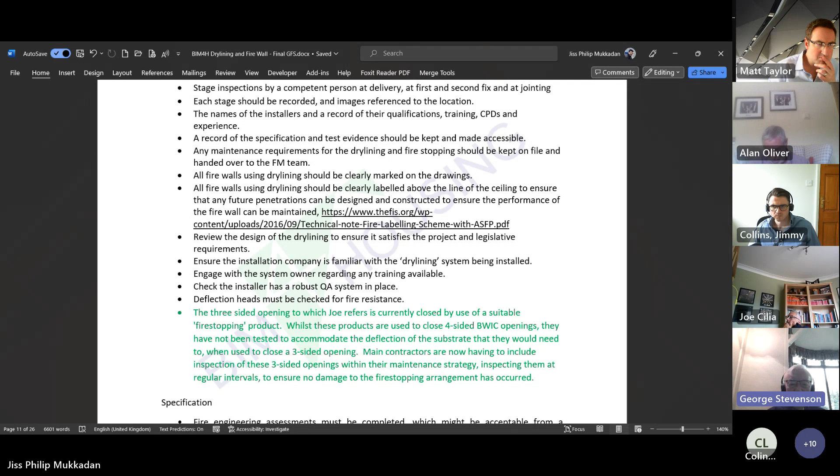How are we doing? I think let's go down to specification. Yeah, let's go down to. Yeah, we go. Right, scroll down, Jiss.

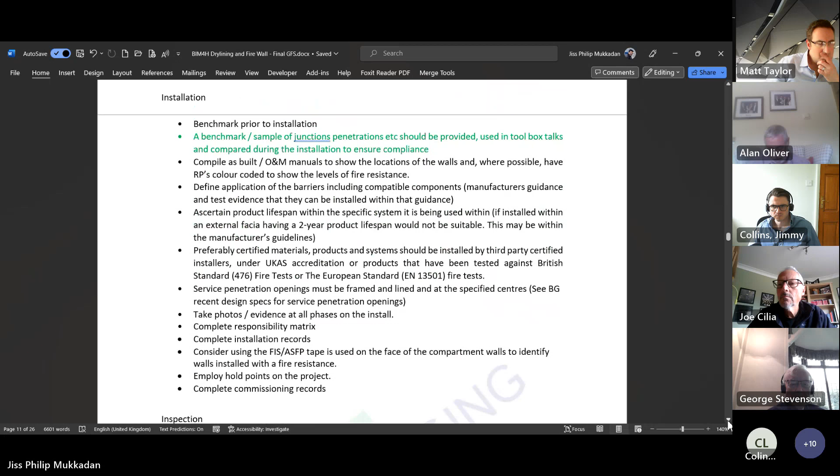What are hold points, Matt? Hold points are points within the construction where you plan a stop to do an inspection, George. So, before second fix, for example. Thank you.

Okay, scroll down a bit more, Jiss. Are people still typing? No. Okay, let's go to question 4 then.

Excellent, excellent. As George said, once we've pulled this together and amended, it will go out to all of you to have another look at anyway. So it's just if we get them. Just before we move on, Joe, is there anything in terms of inspections that is proposed by FIS? Yeah, we've got a quality inspection plan.

I think what you should say is you should adopt a quality inspection plan. We provide one for our members, so that there is a point in terms of stuff which is for members only. We give it all away. No need to become a member. Yeah.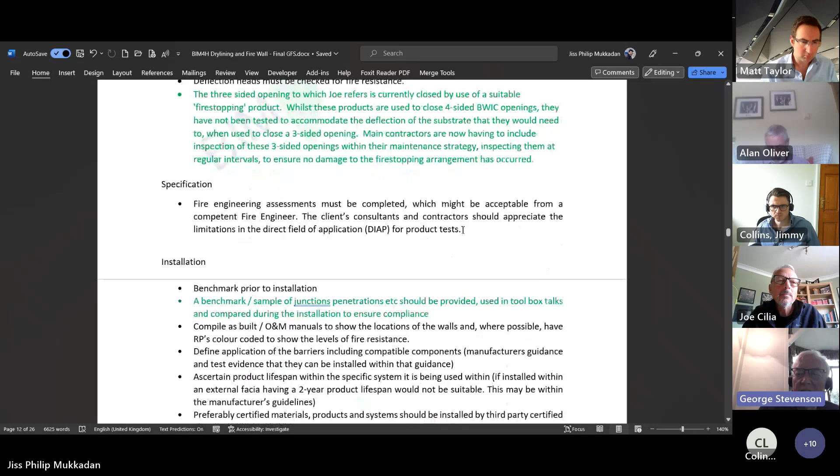Martin, is there anything that, for example, you would do in terms of standardized inspections that you might be able to share? Not sure about sharing it, but it should be captured in the construction control plan. You should set out how you're going to go about doing your inspections and where you're going to keep your records. So it's a prerequisite to all activities, that one.

No, I was thinking more about specific tasks. I mean, I know in the past you've told me that compartmentation is one of the biggest challenges that you have in terms of defects and things like that. Yeah, so I just wondered if there was a checklist or something like that that you would use.

There'll be dozens of checklists, George, to be fair. There are standard checklists for this sort of work, but you need to make them bespoke for the particular wall that you're constructing, I think it's fair to say. You really don't want to go down the template route. It should be bespoke for each and every application.

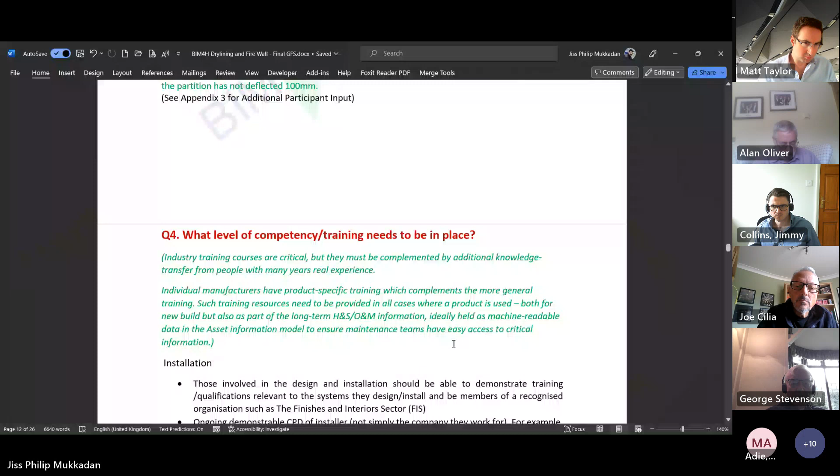Okay, let's scroll down to question 4. What level of competency training needs to be in place? Let's just look at the headings. We've got installation, scroll down, Jiss.

Maintenance. Right, installation and maintenance. So we're talking about competency for installing and maintaining. Have a look at those.

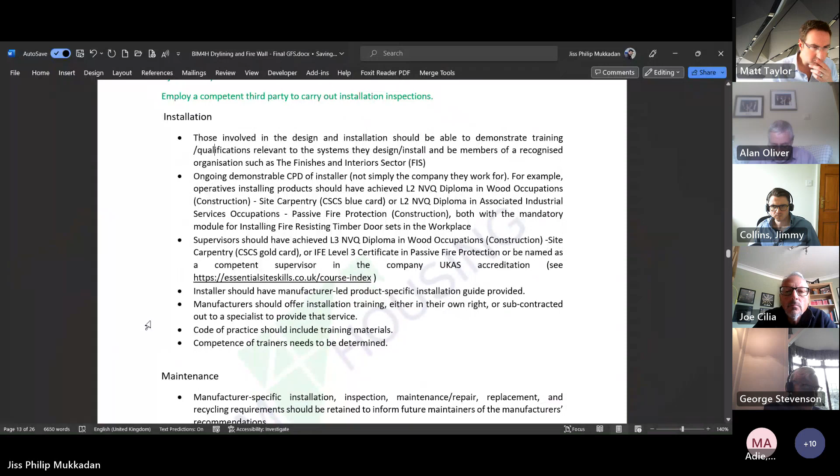Now, these are generic items that pretty much cover right across all the asset types we're dealing with. Is there anything specific to dry lining? Does anybody know what we should be having in there?

There is some work being carried out by Working Group 2 on the subject. It's not quite there yet, but the work is being undertaken by Working Group 2 and also by FIS, particularly around dry lining. Might be worth keeping an eye on that. Any idea when that's likely to come out? I'd hope by the end of the year, George.

Cool, thank you. A couple of items that could go on there. Fixtures pack - all too often, having the right information within the dry lining fixtures pack. All too often you see fixtures packs with no fire strategy information, which is quite often what leads to the issues we've been speaking about with fire compartmentation. They don't know where the fire compartment line is and where the corners are, etc.

And the other thing is toolbox talks. Just having a run through a site-based toolbox talk before building an area, or before building a certain system or combination of systems, can help highlight problems and address any misunderstanding among different operatives. So that's actually information we're talking about there, rather than competency. Could you type it and put it so that we can put that into the information section? Yep, both of those points, I think we need to capture.

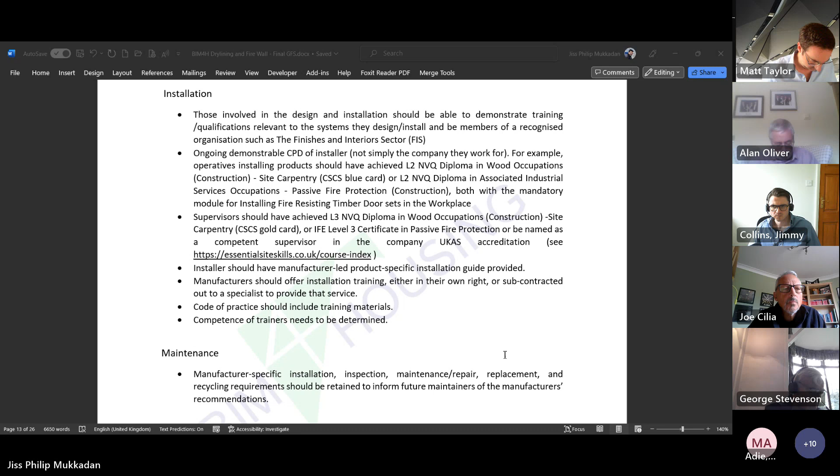Anybody else? The CPA, George, have produced guidance on anybody connected with using a construction product and the levels of competence that should be required for those people. And it's in the chat. Brilliant, thank you, cheers.

Okay, right, let's scroll down. And we'll have a quick look at change management. How should changes to dry lining and firewalls be managed and recorded? Again, much of this is generic, but if you've got anything specific.

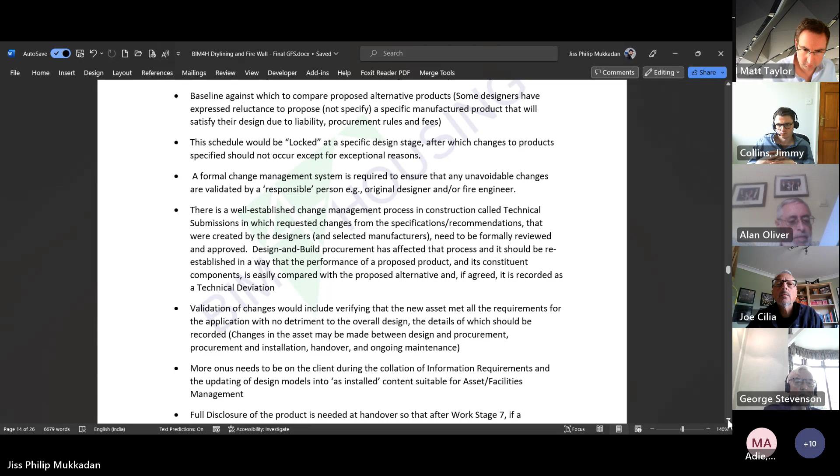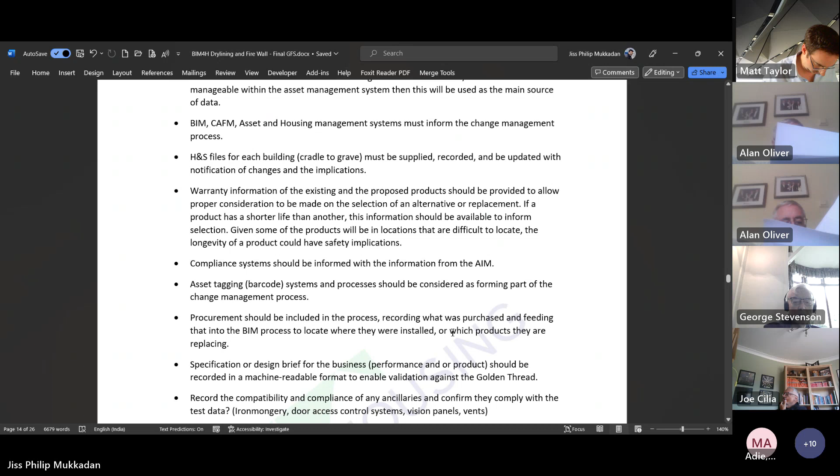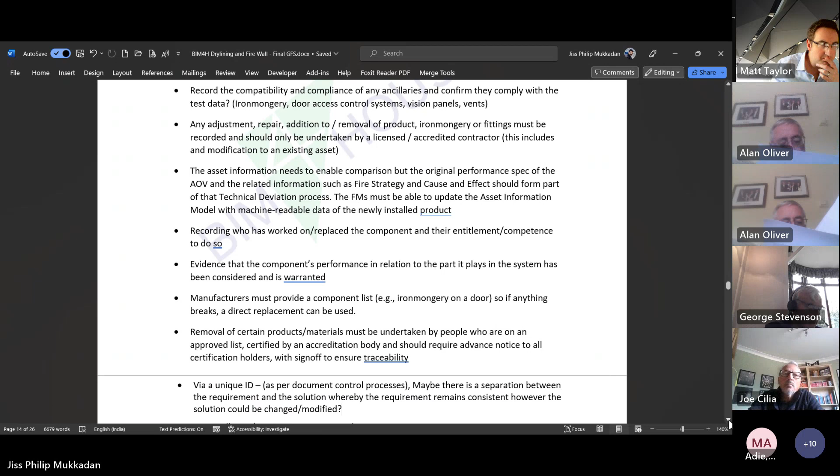Anything maybe more specific to dry lining that should be in here? Is that the last one, Jiss? Oh no, it's not, is it? Is that the last one, Jess? There we go.

Well, that's quite an exhaustive list, isn't it? Anybody got anything they want to add into that? Jiss, are people still typing? I don't think so.

Okay, that being the case, let's - thank you. We've obviously got a lot of work to do on these documents, and that will be done. As I say, that will go out to you all to have another look at in a more leisurely manner and give us feedback. Now, section 2, I should have said at the top, we're looking at information slightly differently now and looking to dig deeper into that section. So George, do you want to have a quick run through of our new approach?

Yes, for some reason it's disappeared. No, I've got it. Okay, so this is something we actually started last year. What we're going to be asking for is - we've obviously made some good progress today, but we'd like, if people are interested in contributing, just maybe another hour and a half session to mop it up. There are 3 areas that we're doing.

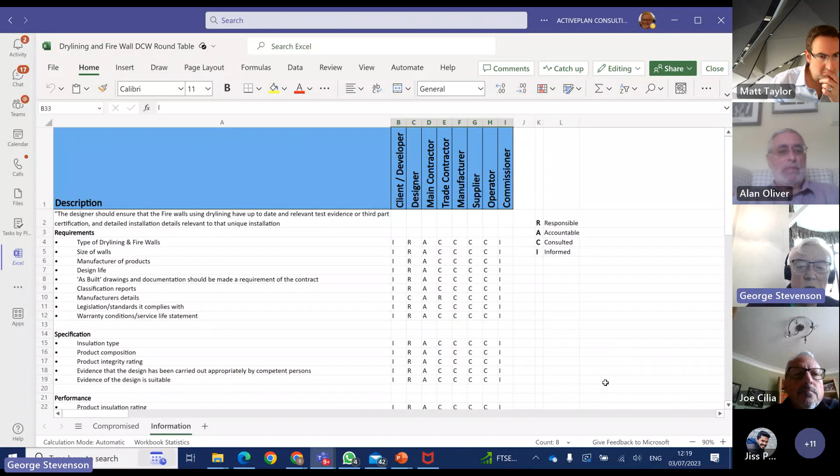One is to look at data and turn it into something that's more meaningful. Another is process, and the other is application. So we'd like you to add your name to the chat, as it were, if you're willing to give a little bit more time on that as a follow-up session. This is the work we've been trying to do to try and make sure that people get the right information for doing certain tasks.

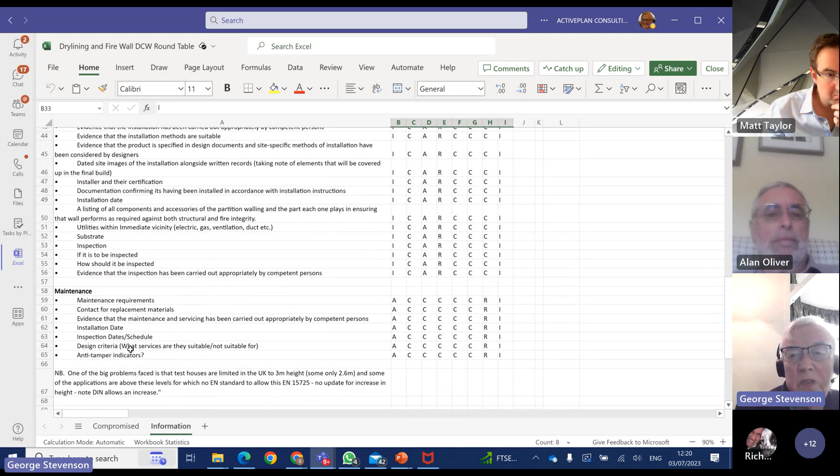And this is just an example we've done based on the RACI methodology, to say who's responsible for actually providing, maybe the design life for example. I don't think these are quite right, but it's about being able to go through and say who's responsible, who's accountable, who needs to be consulted, and who just needs to be kept informed. So what we've done is looked at each of the attributes that were defined, and then we'd like people to, just from your perspective, go through and agree this.

So if you're willing to collaborate on that, that would be helpful. If you are willing to put a bit of time into doing that, put your name in the chat now, and then data, process, or application. Any of those 3, or all of those 3, could be involved in doing that, and we'll follow up with you. Do you like this methodology? Does this make sense? We're just trying to make it so that people aren't overwhelmed with information.

Yes, I think principal designer has a place in there, George. The principal designer under CDM is all too often possibly deliberately overlooked to some extent, but the role of the principal designer should be bringing all that information that's been gathered together and ultimately approving its suitability for use within the building as a whole.

Certainly I'm hearing a lot about that at the moment, and there are some companies that are taking on that, stepping up to the plate to take on that. It's a challenging role though, isn't it?

It is. It's the thing is where you've got lots of different packages all working together. They won't let the dry lining package or personnel involved within the dry lining package won't necessarily know the M&E or fire stopping packages inside out. So it's having that, to some extent, used to be the role of the architect. From what I understand, that's becoming less so.